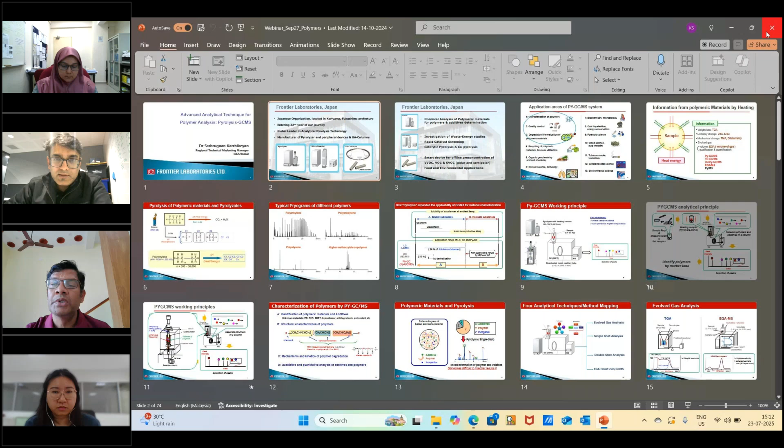I attended my first Pyro Asia conference last year in Guwahati, and it was a wonderful experience seeing a lot of work happening in that area. Thanks to Frontier Lab, who is doing great work bringing academics and industries together, particularly for the Asia region. What I'm going to talk about today is my 10 years of journey in biosolids to biochar research and some of the lessons we have learned.

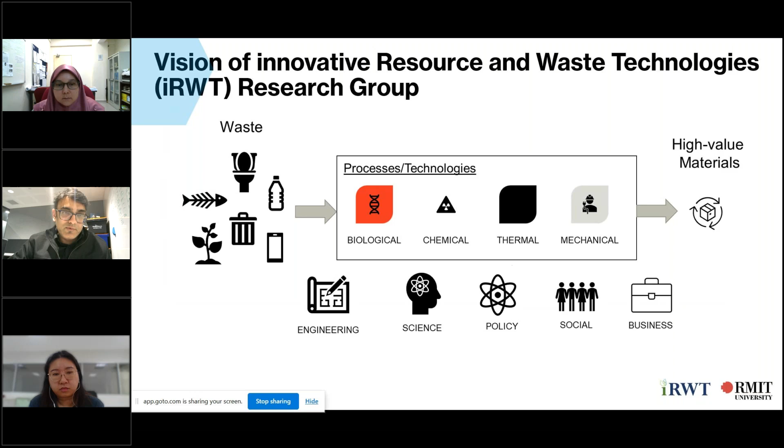Our major area of focus is developing advanced thermal and hydrothermal technologies, also looking at high value material synthesis, nutrient and resource recovery, and destruction and capture of emissions and contaminants.

Our group has in the past 10 years received roughly around $44.5 million in funding and several awards, and we're a large team. In this presentation you'll see there are so many postdoctoral researchers and PhD students.

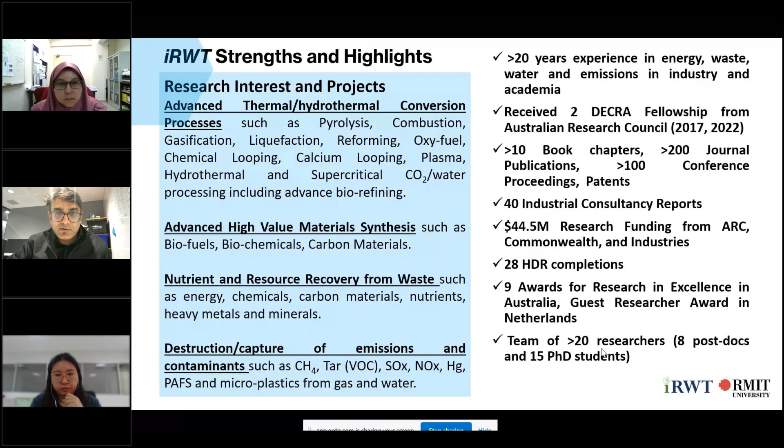We have also now acquired a state-of-the-art IRWT pilot facility from industry and government funding, which covers pretty much the majority of thermal and hydrothermal type reactors. We're also soon acquiring our first PyGCMS, and that micropyrolyzer is coming from Frontier Lab.

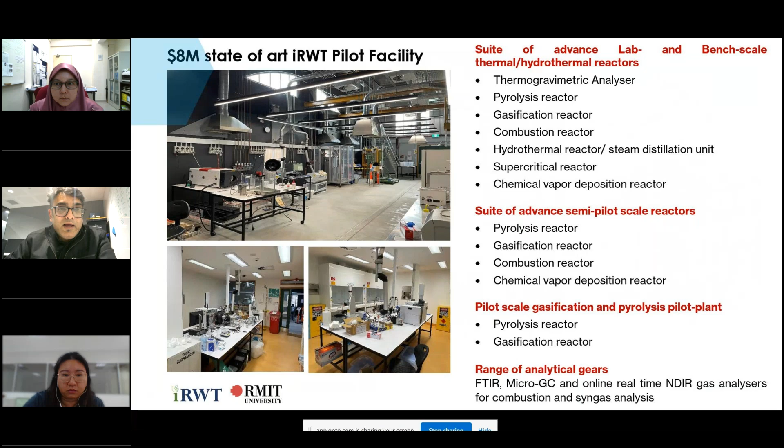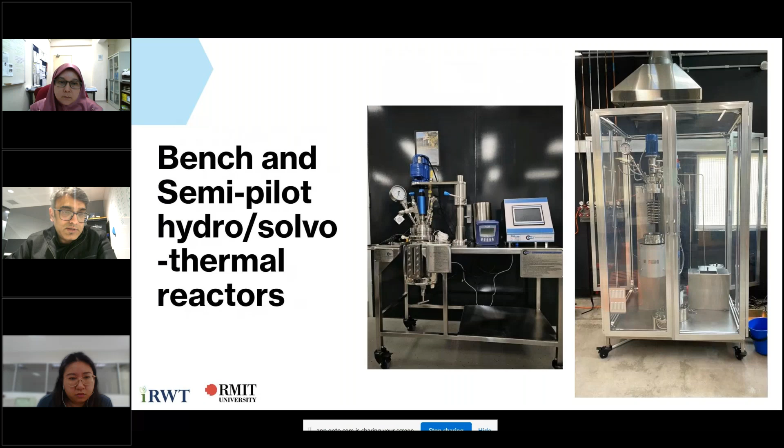We have some semi-pilot and pilot scale reactors in our lab, but also in the field in operation in the area of pyrolysis and thermochemical conversions, including pyrolysis, gasification, combustion, as well as hydrothermal.

Now I'll quickly talk about the center that we had. It's called the ARC Center for Transforming Biosolids, and it was a 5-year center. We just finished, but we had about $16 million cash from industry and the Australian Research Council, and also significant in-kind contribution from industry. We mainly focused on improving three themes: improving technologies, enhancing product applications, and ensuring sustainability around biosolids.

It is a truly national center. I'm saying 'was' because we just concluded, but the center is still in existence. We had pretty much all states participating in the center activities.

Now I'll start quickly with a biosolids fact sheet. What is biosolids? It's very important, in Indian or Asian context first, to understand and define biosolids, because biosolids could be way too different in India versus Australia versus any other country.

Australia mainly produces around 1.5 million tons of biosolids annually. In terms of volume, that equates to one full Melbourne cricket ground. So those who are cricket fans can appreciate that Australia alone produces one full Melbourne cricket ground worth of biosolids annually. We have around 1,200 small, medium, and large scale wastewater treatment plants, so biosolids are produced in a very distributed manner.

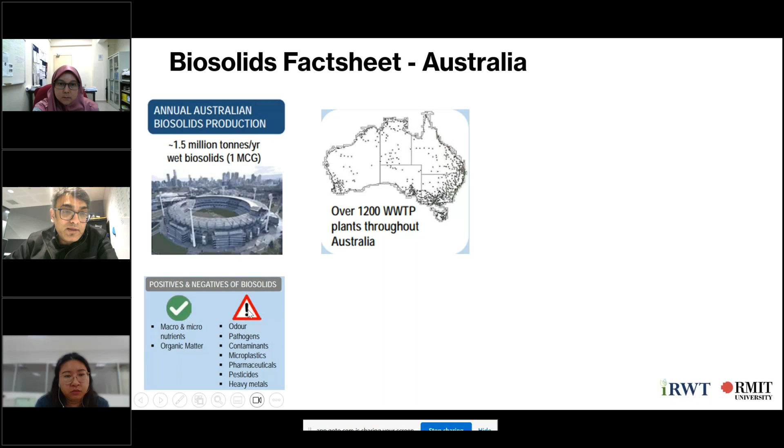Positives of biosolids: they have a good amount of macro and micronutrients, good for the soil. They also have a good amount of carbon and other organic matter, again good for the soil. However, anything you eat, drink, or even put on your face ends up in wastewater treatment plants. So though biosolids have very good properties, they also have some unwanted products, such as pathogens, contaminants, microplastics, pharmaceuticals, pesticides, heavy metals, and they are also very odorous.

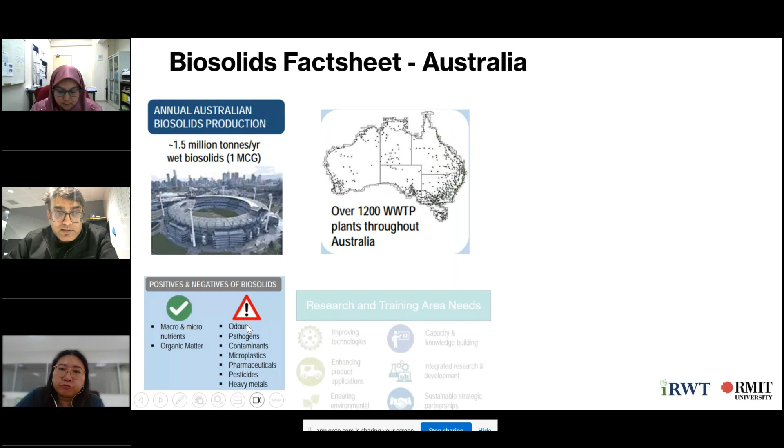What we really felt four or five years back when we were putting up the bid for the Transforming Biosolids Center is that there is a clear need in the area of research and training around biosolids, mainly around improving existing technologies or bringing new technologies, enhancing product applications from biosolids transformed products, and also ensuring environmental sustainability while we transform biosolids, maybe to biochar or any other product. Also, we felt there is a need for capacity and knowledge building, more integrated R&D type efforts, and sustainable strategic partnerships in that area.

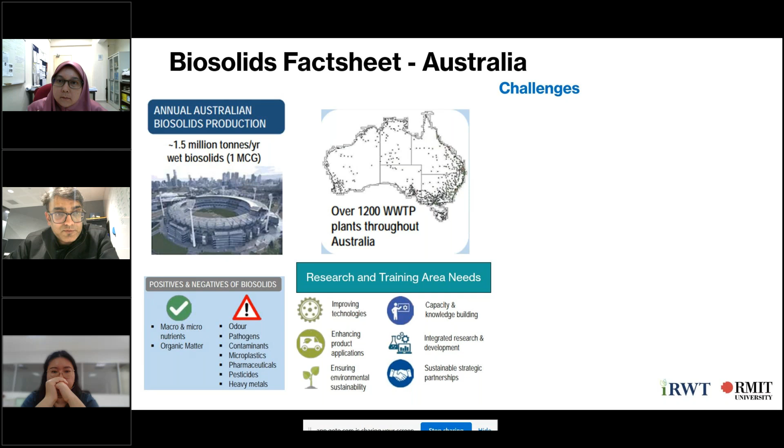What challenges we still find today relevant, even after concluding this center after almost five years of work, is that biosolids land application is almost ceased in Australia due to the presence of per and polyfluoroalkyl substances, PFAS. Earlier biosolids were applied to agricultural land because of their macro and micronutrients and organic matter, but now with this contaminant called PFAS, it's completely ceased. So here we have biosolids we can't apply to soil.

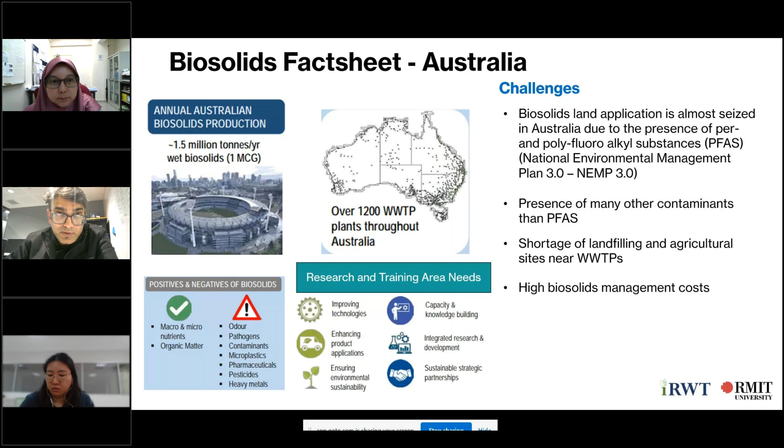There are also many other contaminants present other than PFAS, which are currently not regulated but will be in future. We also have a shortage of landfilling and agricultural sites in close proximity to our wastewater treatment plants. So even if we find a way to put it back to soil, I don't think all biosolids can be applied to agricultural soil. Also, biosolids management cost is very high, and we need to put efforts in future into reducing this cost. If we're going for the biosolids to biochar route, the cost of managing biosolids through the pyrolysis process will increase. So cost-effective technologies are very critical for us to develop and demonstrate.

Also, biosolids are very wet in nature—after dewatering they're roughly 15% to 20% solids. So if you need to transport biosolids to longer distances, it could have higher transportation costs and associated CO2 emissions. In this case, if you want to convert biosolids to biochar, you would need to do it in a more decentralized manner—so a mobile plant or smaller scale plant rather than one big centralized plant. Also, there is a negative public perception around biosolids. Even if you convert biosolids to biochar, people will still feel that you're producing biochar from poo, and here in Australia they have quite a negative perception about any product that comes out of biosolids. So we need to work on that side as well.

Anyway, what my group did in the last seven years is we published around 42 papers in high impact journals. If you look at how we have done publications, we looked at technology assessment and development, resource recovery and establishing non-agricultural beneficial use type applications, co-pyrolysis and soil remediation—again converting biosolids to biochar and putting it back to soil—and we also looked at PFAS management, particularly in biosolids via pyrolysis.

So the questions I'm going to take you through quickly, what we have learned in the last ten years, by answering four key questions. Question one: how different is biosolids when compared to biomass and coal? Some of us might feel that this should be similar to biomass or coal, but as I go through the slides, you will appreciate that biosolids are very different to biomass or coal.

The second question we try to answer is, how should we pyrolyze biosolids? What should be the pyrolysis reactor design? What do we need in the front end and back end, and how should we integrate them to pyrolyze biosolids more safely? Also, what applications should we consider for biosolids-derived biochar, particularly in a non-agricultural sense, where we could apply this product? And how should we select technology for converting biosolids to biochar? Because there are 50 or 60 pyrolysis technology providers out there—which one to select for you?

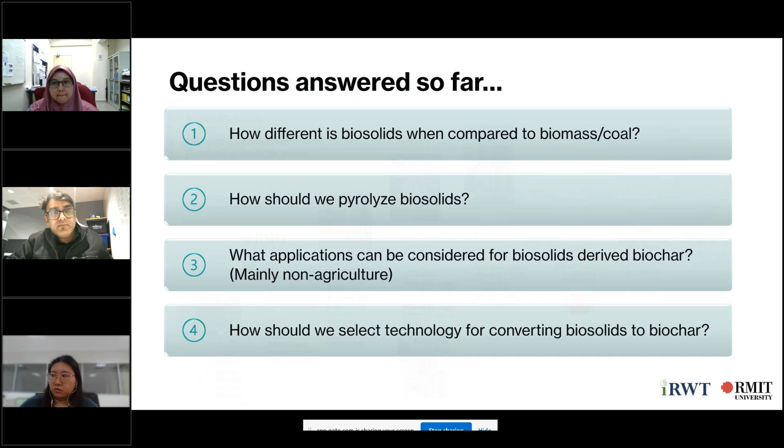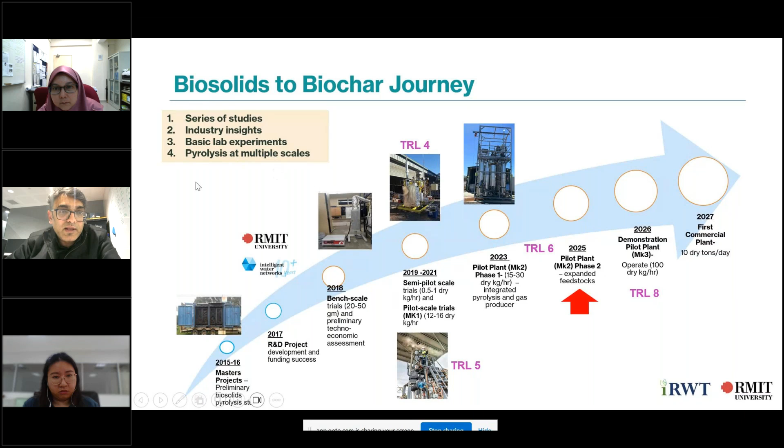What we have done is we started work back in 2015, 2016 with some laboratory studies and field studies, but then eventually we also developed our own patented technology. So we've done a series of studies, worked with industries very collaboratively, and done pyrolysis at multiple scales.

So let me start with question one: how different is biosolids when compared to biomass or coal? To answer this, we first looked at the proximate and ultimate analysis of three different biosolids and compared them with biomass and coal. As you would appreciate, biosolids is very different—they have a very large, high amount of moisture, therefore very low solids content, compared to some of the biomass and coal.

But importantly, after drying, even if you look on dry basis, the ash content in biosolids is much higher compared to some of the biomass and even some of the subbituminous coal. Volatile matter sits somewhere in the middle, but still lower than biomass and slightly higher than coal. Also, fixed carbon varies quite differently across different types of biosolids.

Biosolids could be produced after dewatering. If you solar dry it, that's called solar dried biosolids. If you have a drying pan with more clay content, those are biosolids produced from clay lined drying pans, called clay lined biosolids. There's also lagoon based biosolids, produced from lagoon based treatment plants. If you look at the bottom, the calorific value also significantly varies, and is slightly lower than biomass but significantly lower than coal.

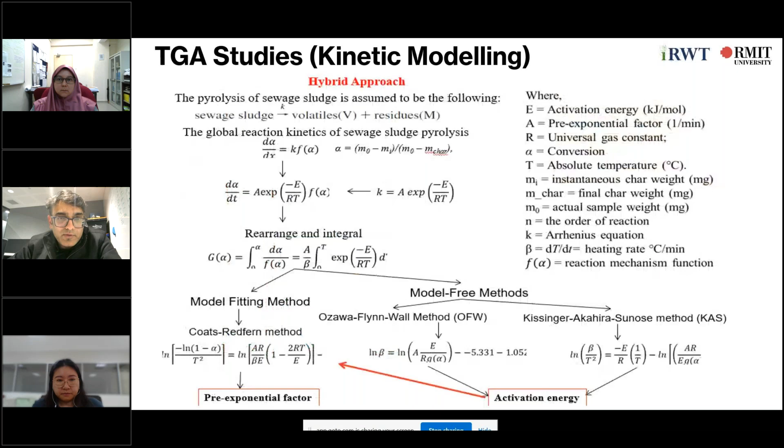We also did a bit of kinetic modeling studies. I'll quickly run through this so you could appreciate the key message. We tried to compare the activation energy of biosolids, solar dried biosolids, with different biomass and coal. What we found is that they are more in the range of biomass, but significantly lower than coal. So they could be pyrolyzed or combusted because of their relatively moderate volatile content and moderate calorific value. Their activation energy is in the range of biomass.

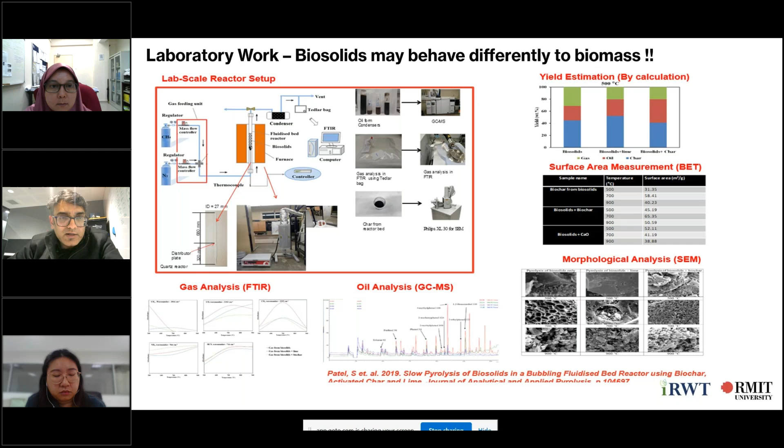We did some laboratory work to understand whether they behave differently from biomass. Yes, we observed that when you do slow pyrolysis in a laboratory setup, you clearly see the difference between biosolids and biomass in terms of yield, oil and gas compositions, and biochar properties. Biomass biochar is highly porous, while biosolids biochar may not be as porous, given they have higher inorganic or ash content. Also, the amount of char produced at the end will be much higher in yield compared to biomass. So there are significant differences there.

We also tried to understand that, because if you want to put these biosolids into any reactor, you want to know whether the biosolids during thermal treatment may attrit more due to thermal stress and other forms of breakage. We did a bit of grindability studies for biosolids in our lab, and identified that biosolids actually have a relatively very high grindability index. That means they're going to attrit a lot more when thermal stress is introduced. So they could generate a lot of dust, and if dust is not handled well, you may have frequent shutdowns for maintenance of your pyrolysis plant. So it's not like a coal pyrolysis plant or a biomass pyrolysis plant. Biosolids is a very different, very fragile material, and will tend to produce a lot more dust.

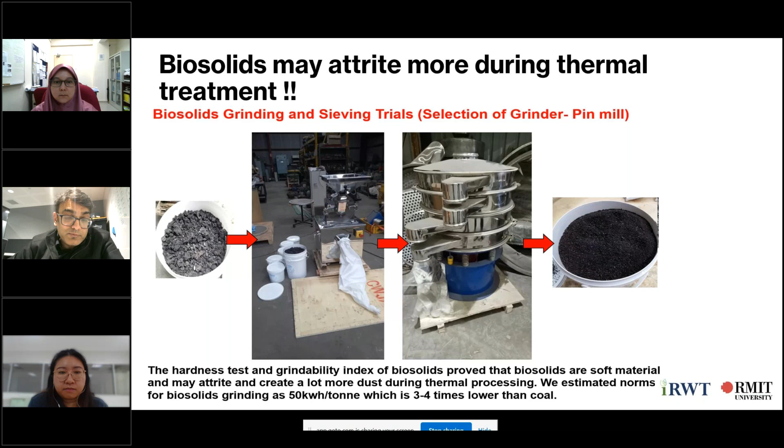Then the second question we came to is how should we pyrolyze biosolids at scale? That's where we started working at different scales, in our laboratory and outside with different plants at different scales. But before doing that, we looked at and compared different reactor designs and tried to understand the key benefits of certain designs.

The majority of reactors commercially available for pyrolysis are either kiln, auger, paddle, or hearth type reactors. If you look at them, their bedside heat transfer coefficients range between 30 to 100 watts per meter square degree Kelvin. However, if you look at a conventional fluidized bed reactor, the bedside heat transfer coefficient could be at least double what you find in other reactors. One reason conventional fluidized beds are better is that they add a particle convection term in the whole equation, which is why the overall heat transfer coefficient on the bedside will always be higher.

However, there are currently no commercially available fluidized bed pyrolysis processes, and there are several reasons behind it. One reason, to quickly explain, is imagine you have a cylinder in which the pyrolysis reaction is occurring. Pyrolysis is an endothermic reaction, so you need to provide heat to the reactor, more in an indirect mode. When you increase the cylinder diameter, the volume increases by the square of the diameter, but the surface area only increases by the diameter. That's why, after a certain scale, even a fluidized bed can't provide enough surface area.

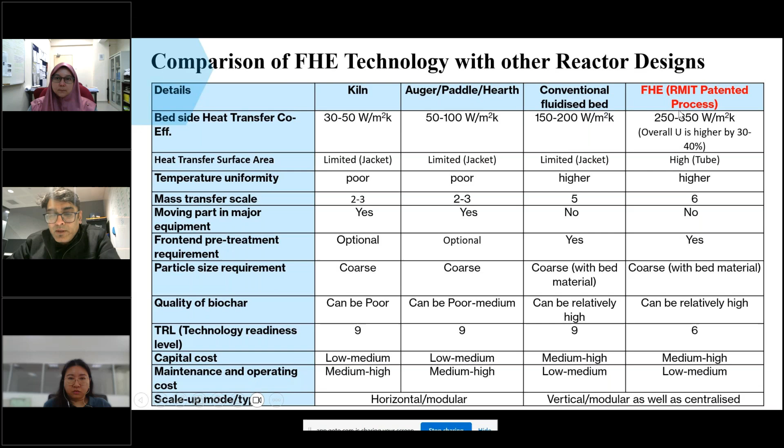And it's RMIT's patented process now. We have done several scale demonstrations with this reactor. It is the first of its kind fluidized bed pyrolysis reactor.

It can achieve much higher throughputs because it has higher heat and mass transfer. The whole reactor is made up of simply tubes and pipes, so it's like a fluidized bed heat exchanger. It's just the heat exchanger type device, so you could easily fabricate and maintain that.

It doesn't have any moving part, which you will have in auger, paddle, or multi-hearth type reactors, or even in kiln. So we hope that with no moving parts present, it will have a much lower maintenance cost and higher plant availability. And while designing our technology, we ensured that we offer flexibility to deal with feedstock seasonal variability in their quality as well.

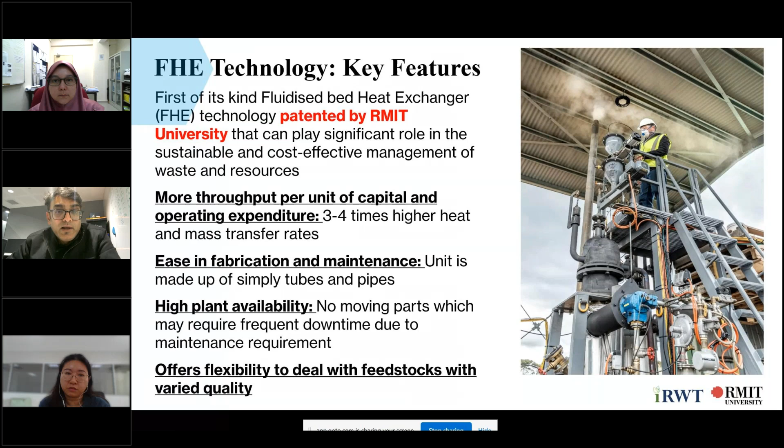Anyway, I think I will skip this, how Pyroco works and all, because I have a lot to present. But I have presented this in the last Pyro Asia conference about this fluidized bed heat exchanger.

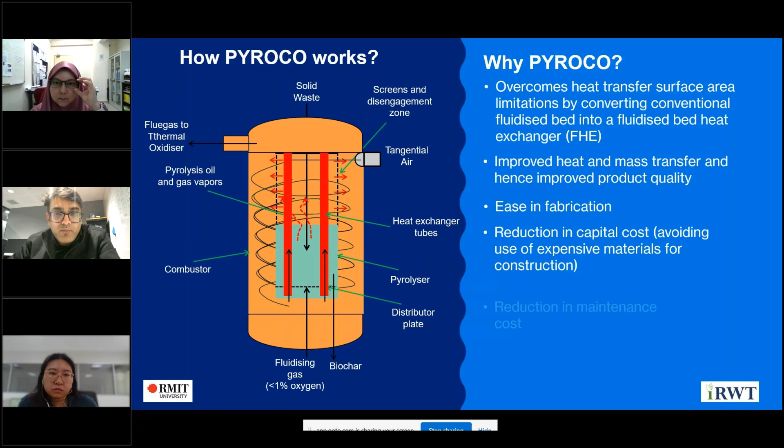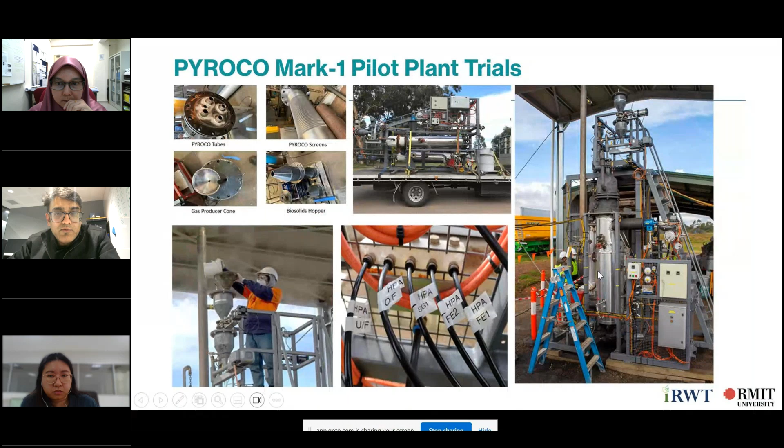But what we have done is we have successfully scaled this reactor. So we conducted a Mark 1 pilot trial. This is what you see is a Mark 1 reactor, which is a fluidized bed heat exchanger. And then we have also now made a Mark 2 reactor, and we have done lots of trials.

So we have almost processed more than 10 wet tons of biosolids from 9 different wastewater treatment plants here in Australia. We have validated some of our claims that we made earlier in our patents, that we could achieve higher heat transfer and mass transfer.

We could achieve energy neutrality, and we could also meet the stack gas emissions requirement from the regulators. So all of that is done with the Pyroco.

But more importantly, what I want to show you today is what biosolids have and how any pyrolysis, not Pyroco. Pyroco may have some advantage in terms of its scalability and all that, but any pyrolysis you do would safely remove some of the contaminants.

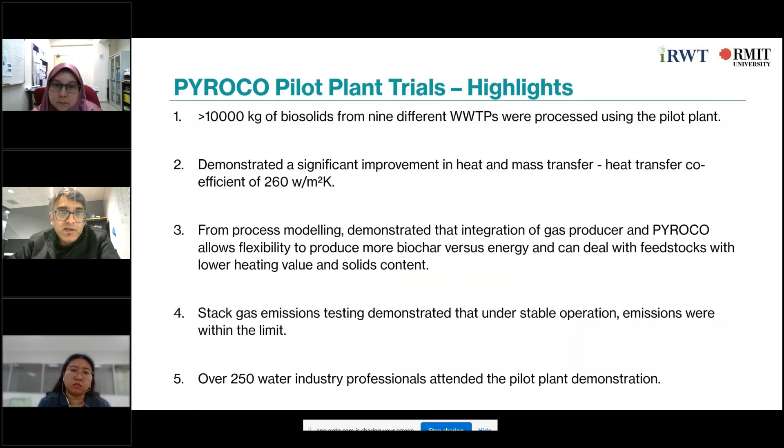So we did extensive studies looking at the contaminants in biosolids and also in biochar through our pilot trials. Biosolids had a lot of pathogens in the beginning, probably, but once you dry it, those pathogens are gone. We also didn't see any pathogens in the biochar at any temperature, left over or regained.

Then we looked at the heavy metals, and what we observed is that biosolids had all the heavy metals from arsenic all the way up to zinc, and their concentrations in biochar were mostly increasing for the majority of these metals. Some of them were increasing to a level where even by international biochar initiative guidelines, whatever they were proposing, we were well within that range, but still they were more for industry grade, so it can't still feed back to the soil because the concentrations are otherwise slightly higher than what you would need for any agricultural application.

We also looked at their leaching test, and we found that biosolids may have more metals leaching from them, but when you convert biosolids to biochar, their leachability goes significantly lower. That means that this biochar, when you apply to any application, the metals related contamination will be relatively less.

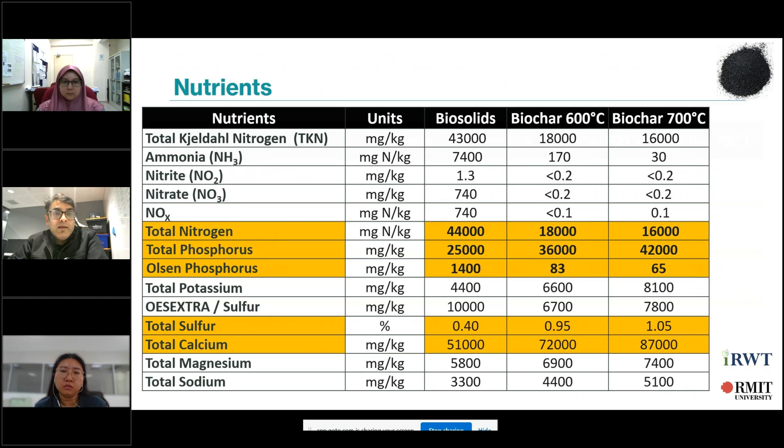And we did some work on biochar application to soil, and we found that if you use that as a phosphorus fertilizer, it can act as a very good slow phosphorus release fertilizer. We also looked at some other properties, and we found that all in all, compared to biosolids, biochar have better physical and chemical properties for various applications.

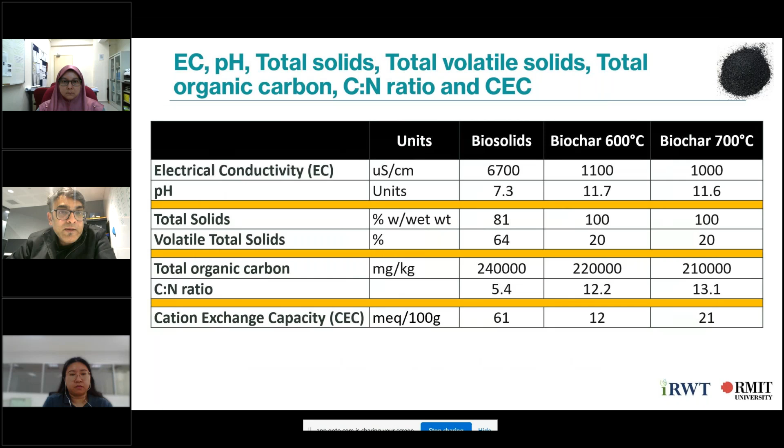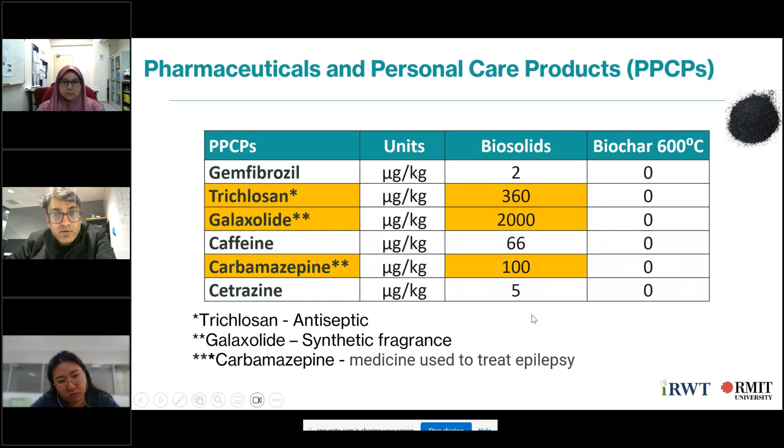We also looked at some of the pharmaceuticals and personal care products that we use in our day-to-day life that end up in our wastewater treatment and hence in biosolids. Majority of them were removed and destroyed at a pyrolysis temperature of 600.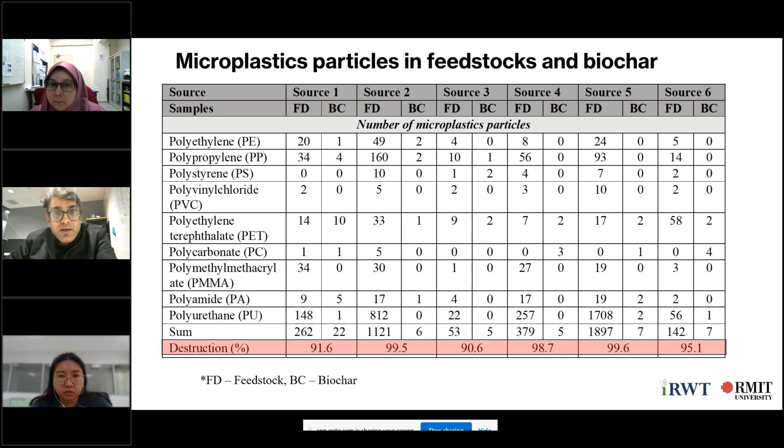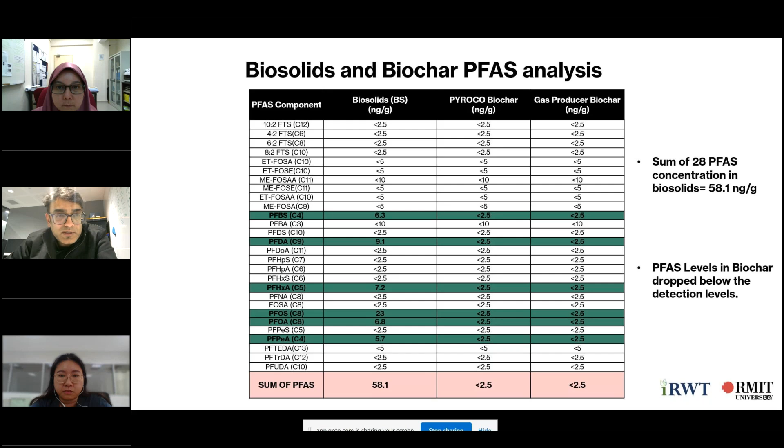Then we did a bit of a PFAS mass balance. We looked not only in the biochar, but also in the scrubber water produced from the pilot plant, and we did gas phase analysis. Then we looked at the overall mass balance, and with that we found that biosolids pyrolysis process with a thermal oxidizer at the back end could achieve pretty much 100% of the PFAS destruction.

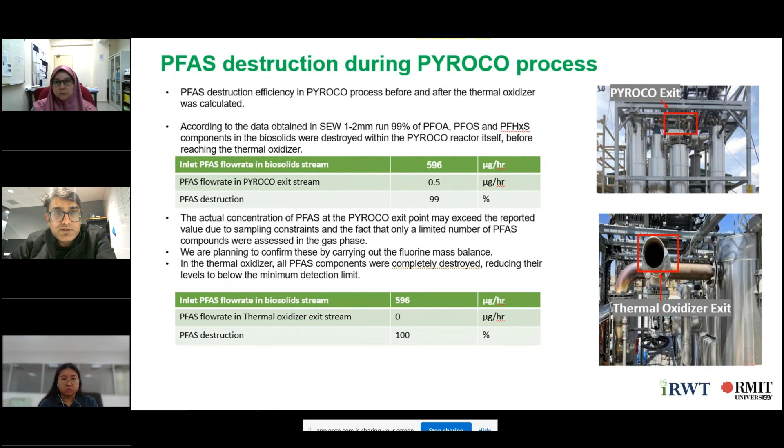PFAS is also a very complex field, so there are so many PFAS and its precursors that sometimes closing mass balance with PFAS is not possible. So we also looked into doing fluorine mass balance, and we tried to really get an answer whether PFAS is completely destroyed in biosolids conversion process to biochar. We got some sense that yes, biosolids pyrolysis process, when integrated with a thermal oxidizer, can completely destroy the PFAS.

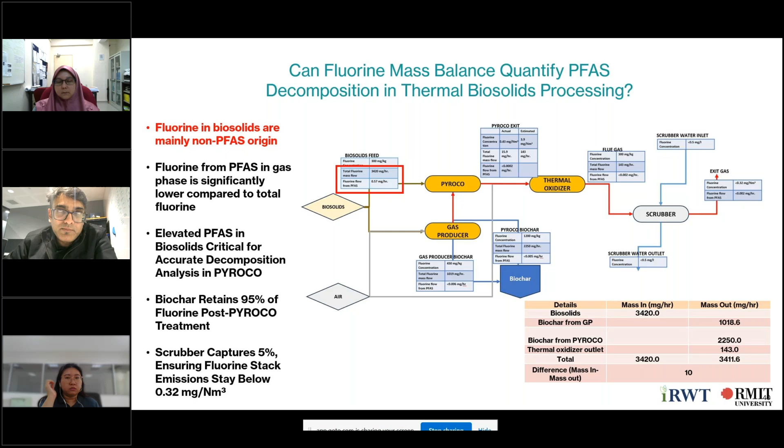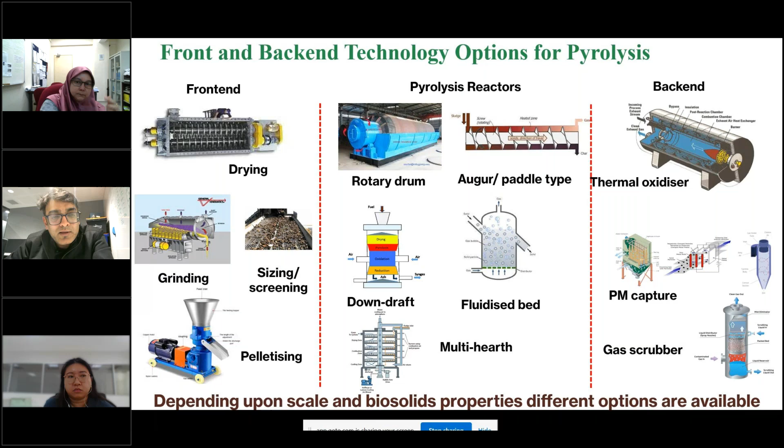Then we also looked into what front end and back end technologies we would need. Biosolids, as I earlier mentioned, is very wet, so it will definitely need drying. But depending on your reactor type, you may need grinding, sizing, or screening units, as well as pelletizing units. Also at the back end, biosolids pyrolysis will need a thermal oxidizer, because pyrolysis can devolatilize the majority of contaminants, but they may not be fully destroyed. You need to combust these oil and gas vapors at much higher temperatures to destroy the majority of these components. So in the back end you need a thermal oxidizer, that's essential, along with other gas cleaning unit operations for SOx, NOx, and PM removal.

With our Pyroco, we did comprehensive stack gas emissions analysis. We followed IED 2010/75/EU standards, and we were able to demonstrate that our trials met the majority of the requirements listed in those standards.

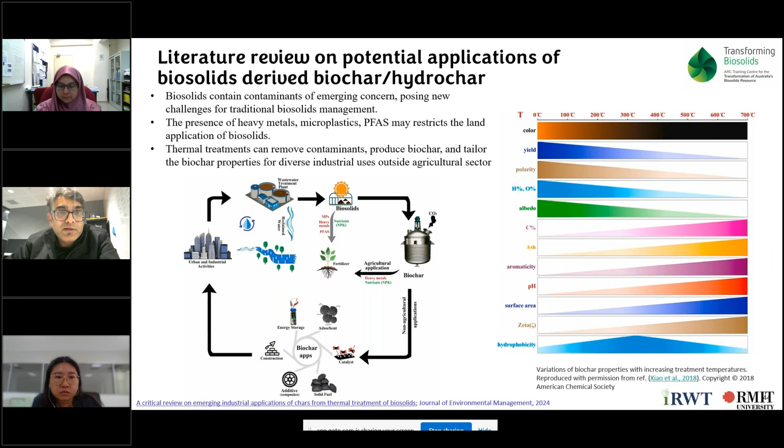We started with a literature review on the potential applications of biosolids-derived biochar, and we identified about 20 different non-agricultural applications we could have when converting biosolids to biochar, applying to almost 20 different areas.

We also looked at some places where we could use our own biochar. Imagine wastewater treatment plants producing biochar, but rather than looking for an external market, finding internal applications for it, so they don't need to rely on external factors. We found that way biochar could have many internal applications.

First, if you want PFAS removed at the influent level, you could sell your own biochar to your trade waste customers and ask them to install biochar-based adsorber units at their effluent treatment plant before it comes to the central effluent treatment plant. So biochar could be a good PFAS adsorbent.

Second, we thought we could potentially use biochar for removal, adsorption, or recovery of ammonium from the wastewater treatment plant, and also use it as an additive in the anaerobic digestion process. Adding biochar to an anaerobic digester could improve biomethane potential by inhibiting ammonia release and the related stress on methanogenesis bacteria.

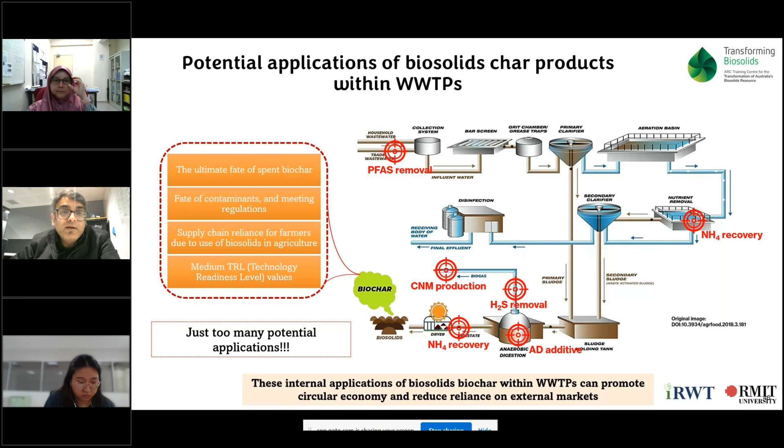So what we did is we developed a TOPSIS based tool, and we put all these applications that we identified from our literature review into it, then did the TOPSIS analysis, and identified the top 6 applications where we could apply our biosolids biochar in the Australian context. Based on that, we did various experimental work in our laboratory and at pilot scale.

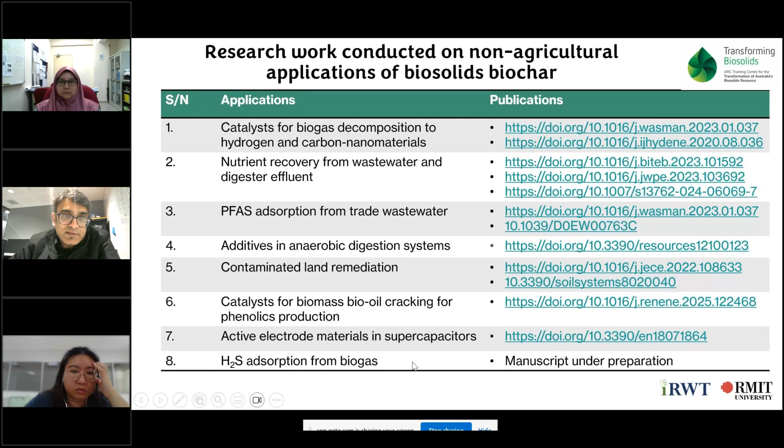We've published extensively in this area. All these papers are published, and I'm happy to share them.

Some of the key findings are, for example, when we looked at biosolids derived biochar use for nutrient recovery from wastewater treatment plants, we found that it was not as good as some of the cation exchange resins and zeolites that are commercially available. So you see biosolids biochar was just sitting here.

But then we looked at some modifications in the biochar, particularly via a very simple acid-alkali pretreatment, and we were able to enhance its cation exchange capacity significantly, so overall adsorption capacity was now almost 60% of the commercially available resin. But understand that this resin costs $3,500 a ton, while this biochar with this added treatment would still cost roughly $1,000 to $1,500 a ton. So if you could use this modified biochar replacing resins for ammonium recovery, it still makes a lot of commercial sense.

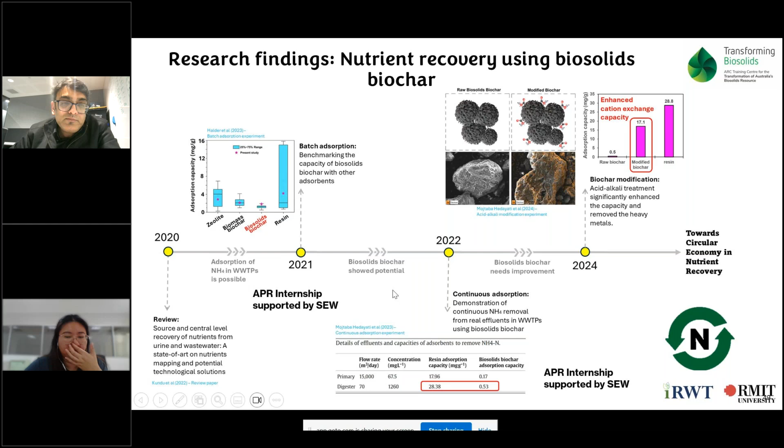We also looked at biosolids biochar as a catalyst for biogas pyrolysis, or biogas cracking, and found that when compared with some synthetic catalysts, it actually performed quite well. The reason biosolids biochar performs well is because it has heavy metals finely dispersed in the biochar matrix, and if they remain active during the biochar conversion process, they could act as a good catalyst. That's what we're seeing - they are available and active, and therefore act as a good catalyst.

We also looked at putting biochar into a highly contaminated wastewater stream, where you could see the PFAS concentrations were very high. When we used biosolids derived biochar, we were able to remove the majority of the long and short chain PFASs, though they were not as good as GAC, but still okay. So it means you might need to put a lot more biochar instead of GAC, but if you produce this biochar on your own, it would still save you the cost of bringing GAC to your site. So on-site application for PFAS adsorption still makes a lot of sense.

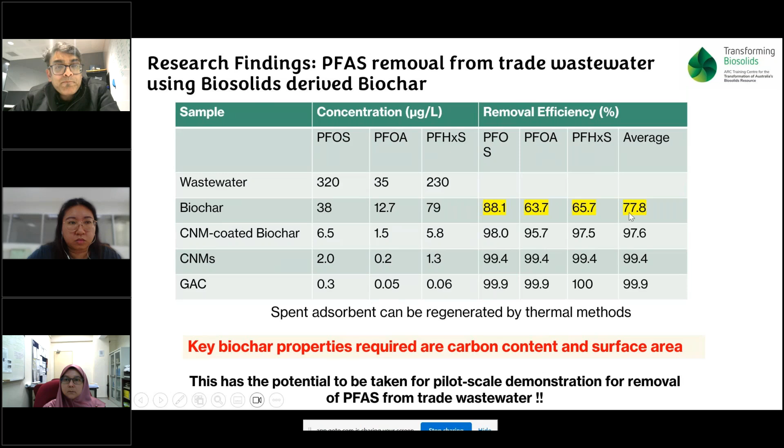We also put biochar into an anaerobic digester and looked at how the biomethane potential increases. Compared to the control where there was no biochar, when we added biochar or even alkali treated biochar, both had significantly higher biomethane potential.

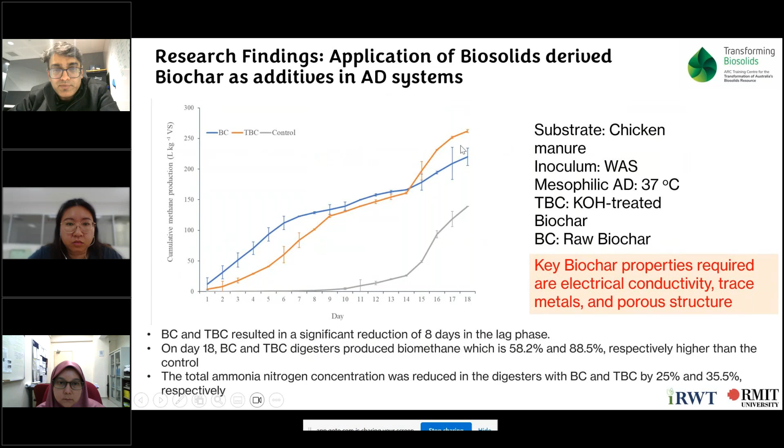We also applied biosolids derived biochar as an active electrode material in supercapacitors, and found that with some modifications, you could achieve pretty good electrochemical properties that could make it more favorable for use in electrodes for supercapacitors and batteries in the future.

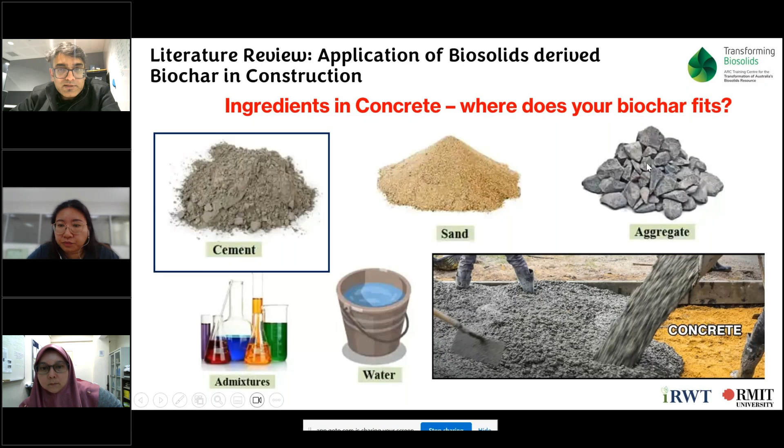We're currently also looking at applications into construction. One very interesting thing we found is that you could use it as a replacement for cement, aggregate, or even in admixture type areas. Cement is made up of lime, silica, and alumina, and if you look at what biosolids have, they have silica, lime, and alumina present. So essentially, to me, it looks more like calcium and some silica, which would put them somewhere in this category. So they could be used more as an aggregate replacement, or when there's higher lime present, they could even be used as a replacement for Portland cement.

So the point is, we're currently looking at how these different types of biosolids could be used in different construction applications. I forgot to add one slide here, but we have now converted biochar into acoustic panels and noise barrier type panels, as well as thermal insulation panels. So we have acoustic panels, we have insulation panels - we could completely make them from biosolids derived biochar.

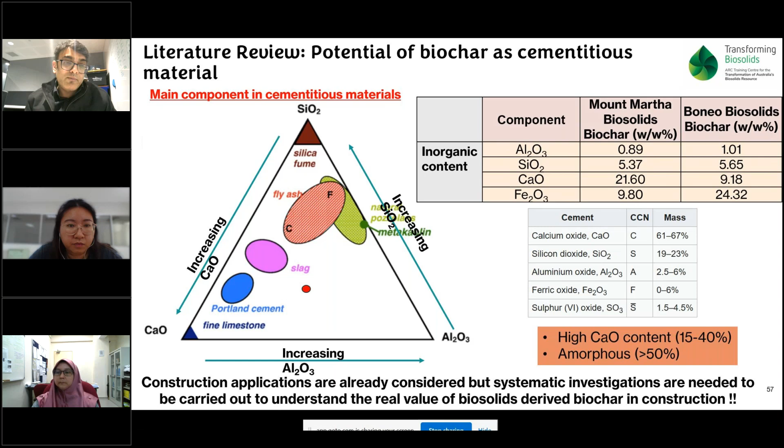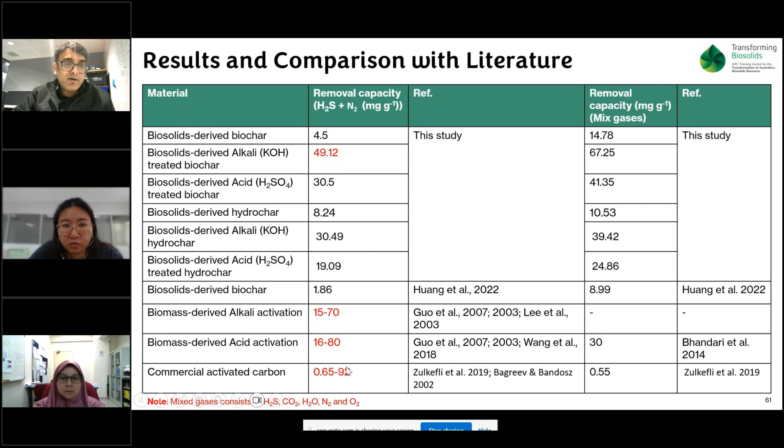Okay, we've also looked at H2S removal application using our biochar, and we compared that against literature. You could see that alone biochar won't work, but if you modify it with alkali treatment, then it could achieve performance at par with biomass or some commercial activated carbon.

So the last point is that we have now demonstrated application of biochar as well. We've solved how we can pyrolyze, how we could apply the biochar, and importantly, we first understood how different biosolids are compared to biomass or coal. The last question is that now there are so many technology providers in biosolids pyrolysis, or pyrolysis in general, so how should the water industry select a technology for converting their biosolids to biochar?

To answer that, we developed a tool called the Biosolids Transformation Technology Assessment Tool. This tool is now getting commercialized in Australia. We developed two basic tools: BETA's Selection Criteria based tool, BETA's SC, and BETA's Benchmarking, where we can compare different technology options by doing a more comprehensive mass and energy balance as well as techno-economic analysis.

We developed this tool based on industry input, but also derived a lot of correlations and empirical indices from literature review. The BETA's SC tool considered a lot of factors, and we asked our industry partners to rank them according to their objectives.

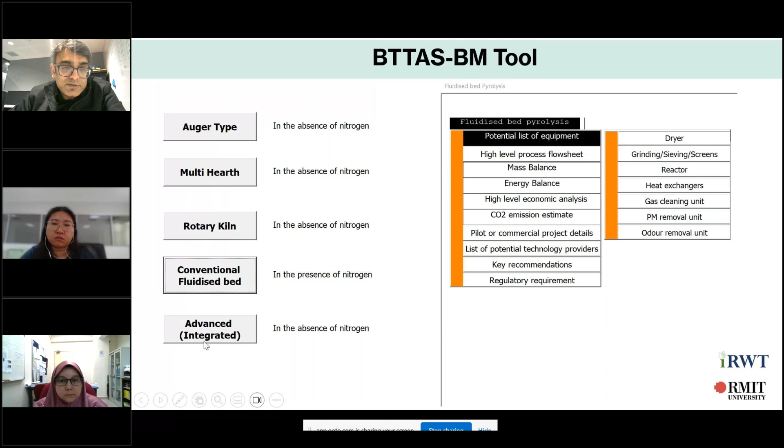With the BTTAS-BM tool, we developed a comprehensive mass and energy balance model for auger type reactor, multi-hearth, rotary kiln, as well as conventional fluid bed and the more advanced fluid bed designs we're working on. So we developed comprehensive mass and energy balance as well as techno-economic analysis, allowing more apple-to-apple comparisons of different technologies.

You would need a lot of data from technology providers for this, but once you have that data, you could put it into this tool and generate a good mass and energy balance as well as an overall economic analysis. So what are the key conclusions?

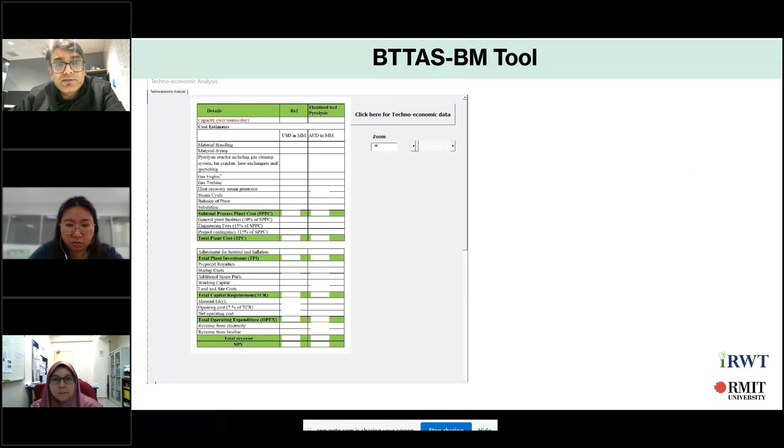Biosolids are different to biomass and coal. Biosolids pyrolysis can safely remove contaminants, and as long as you have thermal oxidation post pyrolysis of biosolids, it will ensure destruction of contaminants. Biosolids derived biochar can have different potential non-agricultural applications, but some may need modifications.

Techno-commercial viability of biosolids pyrolysis needs to be treated slightly differently. When you look at producing oils like SAF or other products from biomass, that's a completely different business case. But this is more like a technology you're adopting to treat contaminated waste, so it's more an environmental technology rather than one really looking at generating significant revenue.

So this should be treated by government regulators, water bodies, or waste management companies more as an environmental technology rather than a significant revenue generation stream. Where you could get benefit is if you demonstrate high value applications of biosolids derived biochar, which could generate some additional revenue. But again, you need to perform a proper cost benefit analysis.

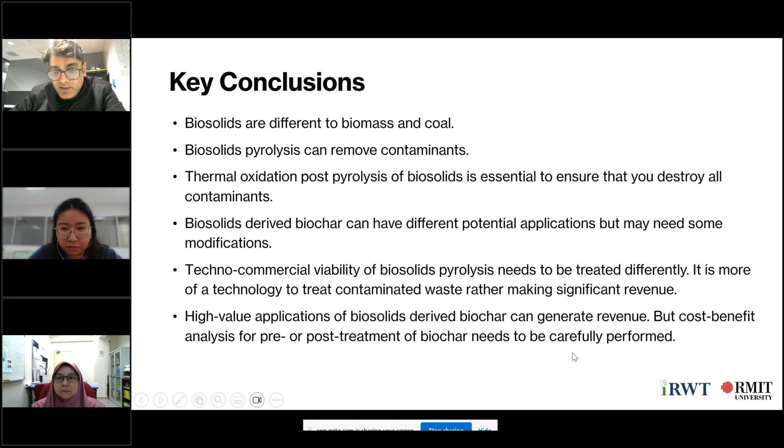Some future challenges for those still working in this space, or who want to work in it: pyrolysis technologies are still evolving in the biosolids space, and there's a lot more to cover. Co-pyrolysis could be the next big topic.

Siloxanes found in biosolids are one of those contaminants that could create a lot of downstream problems. More research needs to be done in the siloxanes area.

PFAS and microplastics, on the analytical and sampling side, including their mass balance, is still an evolving space requiring a lot more research. New emerging contaminants are coming, and we need to keep checking whether we can safely remove and destroy them in the thermal oxidizer. More and more contaminants are being found in biosolids, so this work will continue in that space.